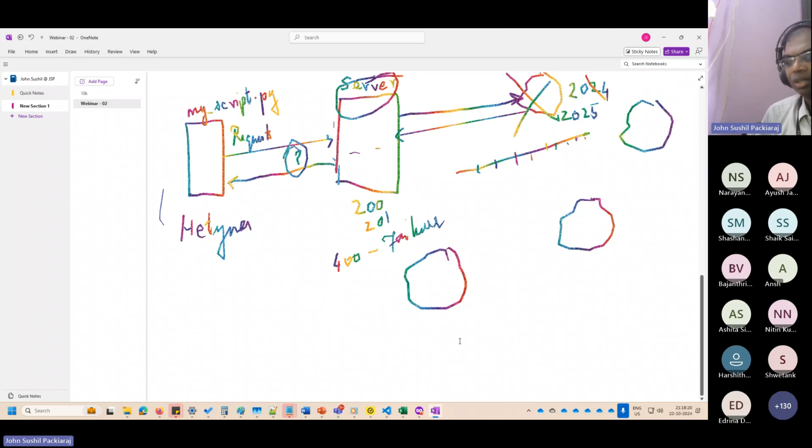The next part of the meeting's agenda is going to talk about a few of the concepts of physics which you have already studied, and these concepts are worth remembering or reminding yourself of. So whenever you are going to work on the physics for this hackathon, there are a few terms which you'll have to remember. I would love to have somebody tell me what stress is and what strain is. Okay, these are the very fundamental definitions which we are refreshing again.

So whenever there is a force acting, you try to standardize what is the value of force. So you simply divide it by area. So suppose the area is large, even if the force is more, the body will still be able to take it. Okay. So for example, you can take a pen or a paper or something and then try to, yes, I got the comb over here. So if you look at this comb, I will be able to apply a lot of force, and still it will be stable. But beyond a particular point, it will start to bend.

Okay. On the other hand, this perfume bottle, I'm going to apply force. The same kind of force is still not going to make much of a difference. Okay. There are a lot of things which go into that. So let's go back to the heart of the matter. So again, you'll also have studied about strain. For the very simple purpose, I'm just calling it the ratio between the change in length and the original length.

So for example, suppose there is an element, and this element is being subjected to a pull. So when I am pulling this, anybody will tell that this is going to exhibit some properties. The property is this is going to become a little longer, but it will become little, ouch. Yeah, it will also become a little thinner.

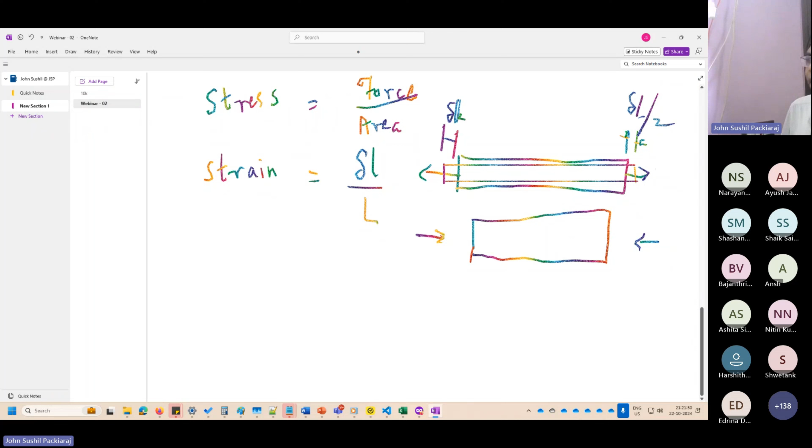Okay. So this is what happens whenever you are having a beam. It becomes a little thin, but it also becomes longer. Same thing happens if I'm going to apply a force that pushes against it; the object will become fatter, but also it will become shorter than the original condition it was in. So this change in length which you see, for example, this may be del L by 2, and this extension is going to be del L by 2. So this entire thing becomes del L, and L is the original length of the element which was being pushed or pulled.

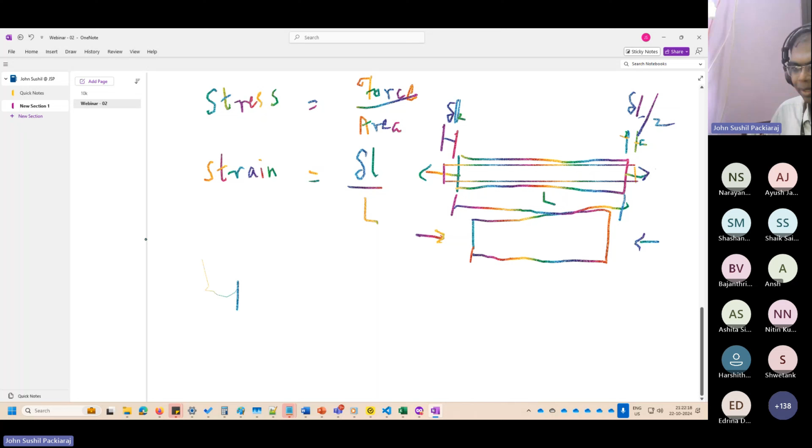You are going to encounter one more term, which is Young's modulus E. I don't know why the pen is becoming so sensitive all of a sudden, but yeah, Young's modulus is nothing but your stress by strain. So this ratio essentially tells how easily something is going to bend or remain as it is. That is, even if there's a force, whether there's going to be a change or not, you will be able to measure with the Young's modulus.

The other important term is going to be stiffness, or I. What happens essentially is you'll find that the deeper an element is, the less likely it is going to bend. I'm having a comb. I can bend the comb easily on the flat side, but if I keep it on the deeper side, that means with the teeth of the comb vertical, and I try to bend it, you'll find that it's really not possible to bend the comb at all.

So I is nothing but the moment of inertia. Different sections have different values of the moment of inertia. We don't need to really worry too much about the moment of inertia in terms of the formulas. Moment of inertia is a measure of resistance to bending. Okay, moment of inertia is a measure of resistance to essentially rotation, okay, not bending, to rotation.

Bending happens because there is a rotation, basically. You do remember, maybe in your 9th or 10th physics, you'd have had a doll put on a circular disc, and you can rotate the disc. If you take the weights away from the center of rotation of the doll, you'll find that the rotation is actually very difficult to stop. So these are some of the concepts of physics which you have already done, which you are going to apply here. So what is the moral of the story? If moment of inertia is high, bending does not happen.

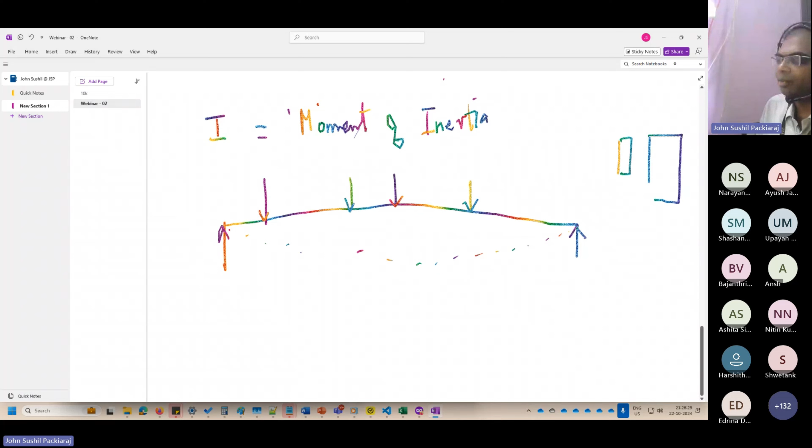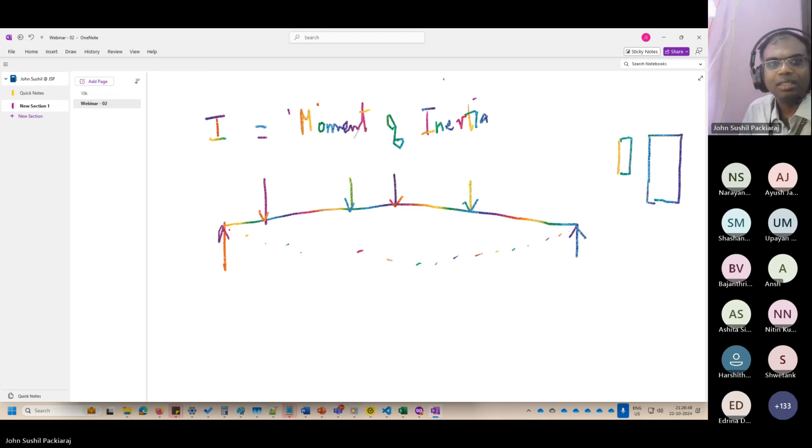So if I'm going to keep the bridge with a load like monkeys, then the bridge takes a bent shape. What value of I should I take so that the bending is very less? So you'll be able to have a series of I values, which you'll have in a list. You'll keep putting each value by using a loop in Python, and essentially be able to see at what value of I this material will not bend beyond a particular level.

So another thing is I can change the material. Whenever I change the material, the value of E will change, unless both the materials have the same value of E. So maybe I can also change the value of E to find whether it doesn't bend that much. So these are some of the applications which you can work on.

Now I can change the load. I can say that a baby monkey is there. So the baby monkey is, let's say, 1 kilogram. Daddy monkey is there. This is daddy monkey, let's say. Daddy monkey may be 11 kgs. Baby monkey may be standing here, 1 kg. So this may be another baby monkey, 1.5 kgs. It's a really tiny baby. So I can call this 0.75 kgs. So you'll find that loads are there.

If the daddy monkey comes to the middle of the bridge, it is going to bend more. You will be able to visualize this definitely. This is another thing that causes it to bend. You don't want it to bend beyond a particular level. You don't mind it bending slightly, but if it bends more, you don't like it. So this is another thing which you can work on. In the same way, you can do a lot of other things.

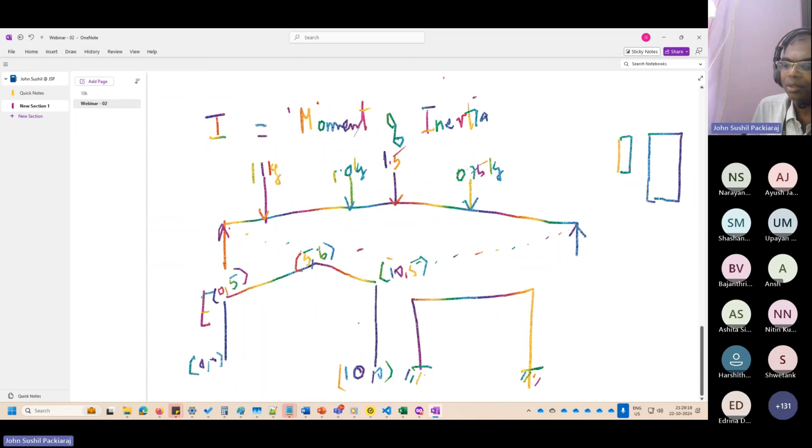Essentially, to get a geometry, you need points, 0, 0. So let's say that this is 0, 5. And this is, let's say, 5 meters away, and let us say that this is 6 meters tall, and this will become 10 meters. So let me say that this is 10, 0, and this will become 10, 5. So once you have these coordinates done, you'll be able to make it. You can also do this programmatically. So these are some of the things which you will be doing in your hackathon.

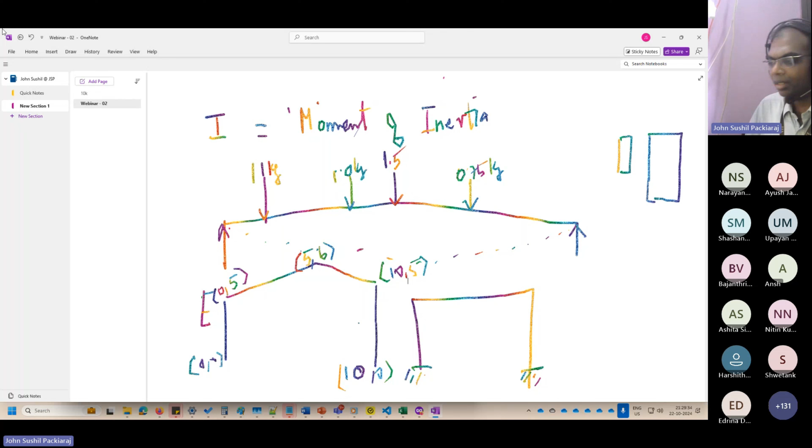So I know that these are all very, very simple things. You just need to apply a little bit of your mind, and you will be able to work on this quite easily. We will, of course, be making it progressively challenging, but you don't have to think that it is going to be so difficult that nothing is going to work.

Okay, so let's get to the Q&A part.